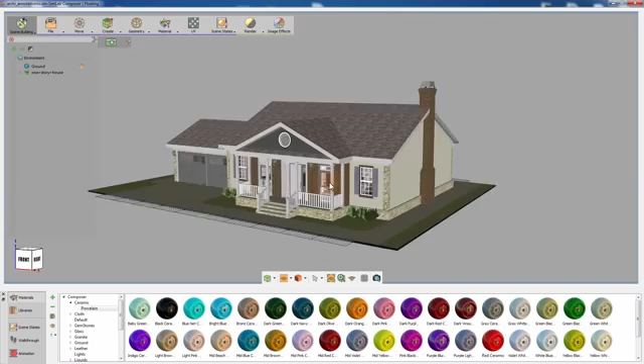In this tutorial, we are going to talk about adding annotations and measurements to your architectural design and how you can manage the measurements to create a professional presentation that facilitates communicating and sharing your design. This is a one-story house design created in SketchUp.

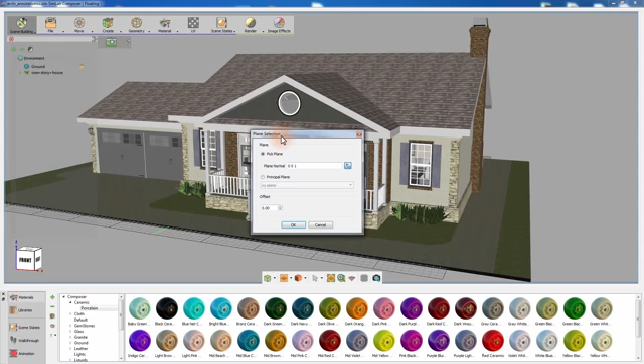Go to the Create menu and select Annotations. The Plane Selection dialog will appear. In this dialog, we are going to determine the plane on which we are going to create the annotations. Selecting the proper plane for the annotations creation is crucial in terms of where the annotations will be projected for viewing. Since we are going to add measurements for the front elevation, we need to select XY plane, or simply click on a parallel face to the front view.

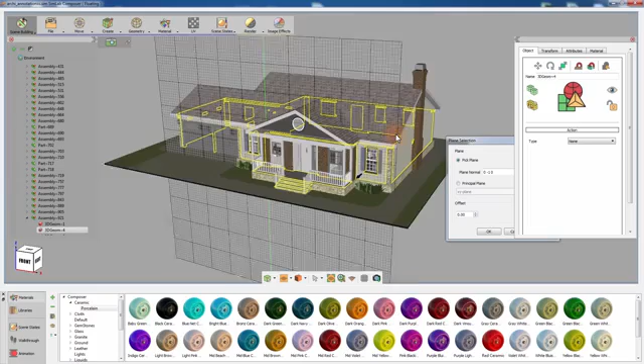Click on this wall and notice that a blue arrow has been created in the place of picking, indicating the normal of the plane you selected. Notice also that the grid has been rotated to match the plane you selected for annotation creation. Aside from picking a plane from the 3D area, you can determine the plane by selecting one of the principal planes in SimLab Composer. You also have the option to offset the plane you have selected parallel to its axis. Click OK to set the plane and initiate the Annotations Creation dialog window.

SimLab Composer allows you to create several types of annotations. The Linear Dimension tool measures the projected distance between 2 points on the principal axis, while the Aligned Dimension tool measures the distance between 2 points in space without projecting their location on a principal axis. The Radial Dimension tool measures the radius of circles and arcs in the design. The Angular Dimension tool can measure the angle between two intersecting lines. And the Leader Annotation tool allows you to add custom text with a pointer to the design.

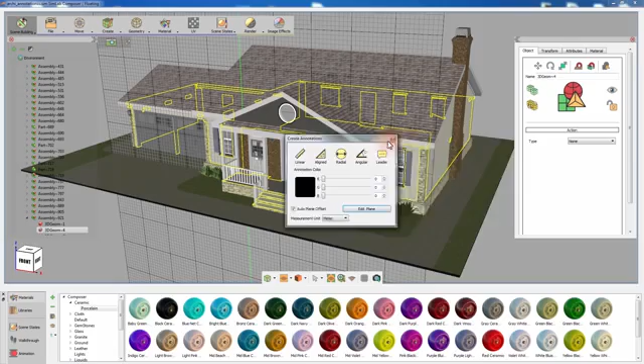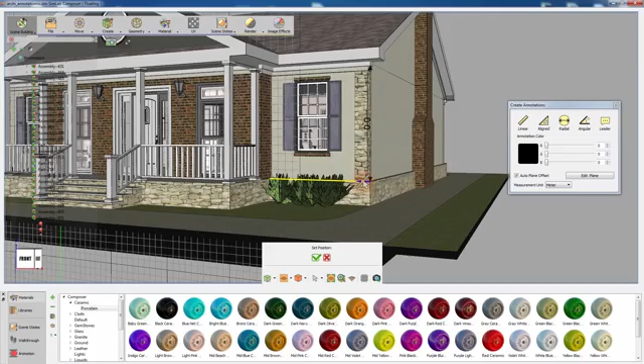Click on the Linear Dimension. To measure the height of this wall, click on the top edge of the wall to set the first point. Then click on the lower edge of the wall to set the second point of measurement. Move the cursor to determine the position of the annotation and click to confirm it.

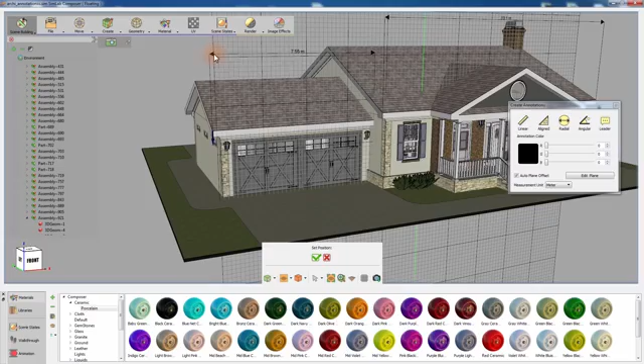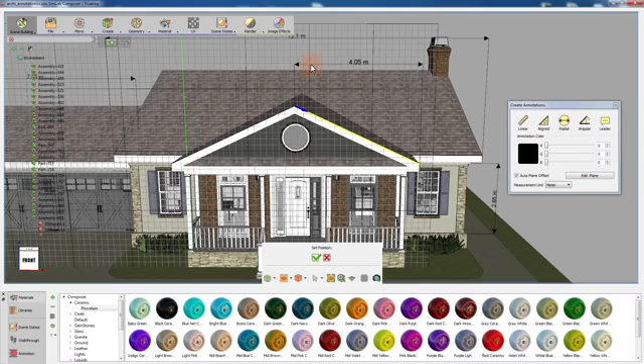To measure the width of the rooftop, create a linear dimension annotation and set the first point at the far right edge of the rooftop and second point to the far left. Move the cursor towards the top and click to set the position of the annotation. Click on Linear Dimension and measure the distance between two diagonal points. Notice that the Linear tool measured the projected width of the 2 points and not the distance between them.

Click on the Aligned Dimension tool and measure the distance between the same points you measured earlier. The Aligned Dimension tool will measure the distance between 2 points without projecting the values to the principal axis, which can be useful in measuring diagonal surfaces and edges. Select the Radial Dimension tool and click on the edge of the circular window to measure its radius. Click again to set the length of the annotation's indicator, and by moving the cursor, determine the length and orientation of the measurement's text.

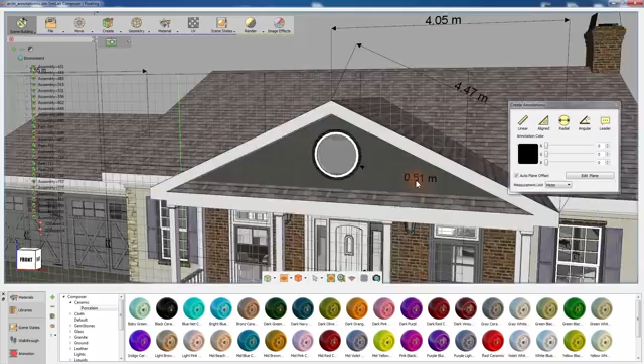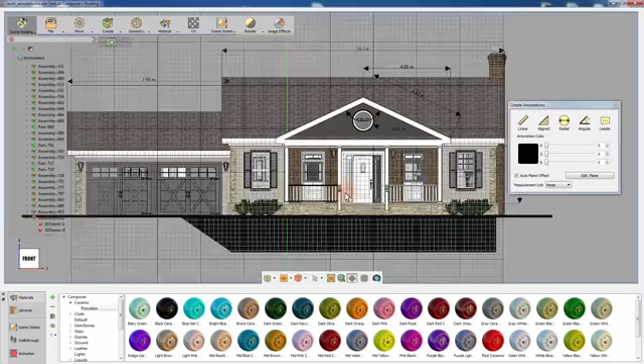Click on the Angular Dimension tool and click on an edge to set the first line, and then click on another intersecting line to measure the angle between them. Move the cursor to position the measurement's value and left-click to confirm its location. Aside from creating annotations in 3D space, you can set the camera to a front view and switch the camera from a perspective view to parallel view, which is the equivalent of an architectural front elevation drawing of a house. And from there you can proceed with adding annotations to your design.

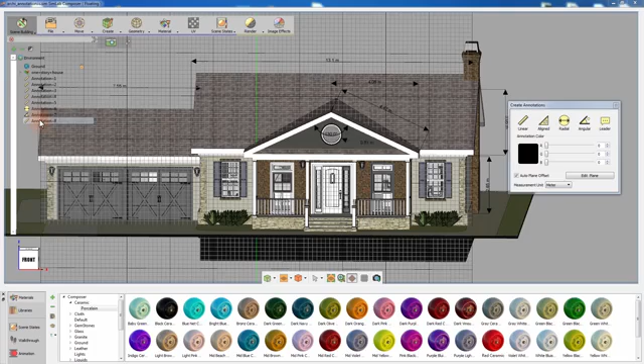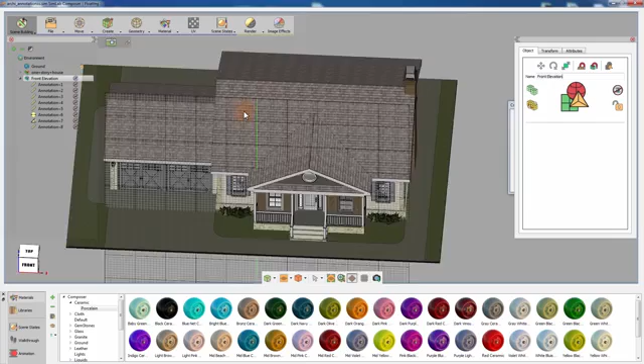In the Object Tree panel to the left, select all the annotations you have created and right-click and select Add Parent. Change the name of the newly created group to Front Elevation. Arranging the annotations into groups allows you to have better management and control over those annotations. Select the rooftop objects in the design and press H on your keyboard to hide them and reveal the interior structure and details of the house.

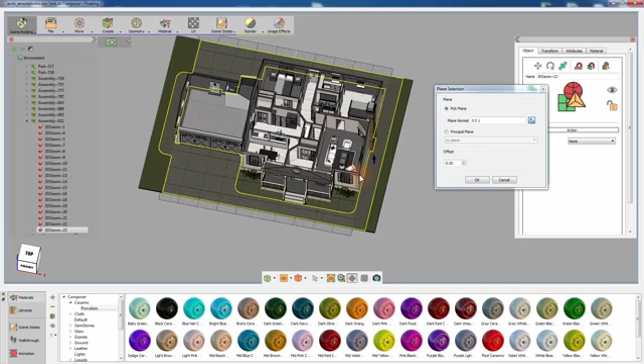Now that you are about to create annotations for the floor plan, you need to change the plane used for creating the annotations. Click on Edit Plane from the Annotations dialog and click on the ground or any surface parallel to the top view. Click OK to confirm the plane and go back to the Annotations dialog. Following the same steps as earlier, create a linear dimension. Then set the 2 points of measurement by clicking on edges. Then set the position of the measurement text and left-click in the position to confirm the creation.

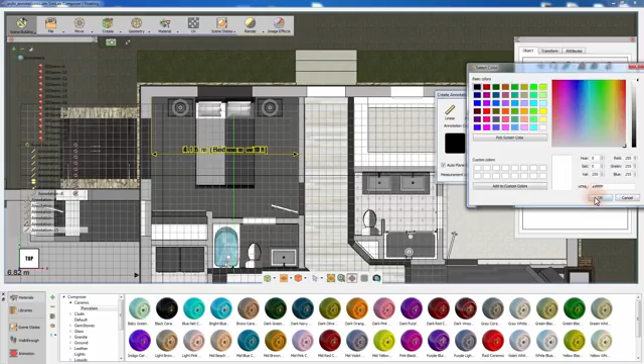Click on the annotation you created to access its attributes. From the Attributes panel to the right, you can add extra text that will be positioned next to the measurement value. You can also change size and color of the annotation through the panel. Changing the size of the annotation can be used to clarify its appearance or to emphasize its importance, while changing the color can eliminate conflict with the color of the object behind the text, or it can be used as a way to manage your annotations, where you give a group of annotations a certain color to indicate their purpose.

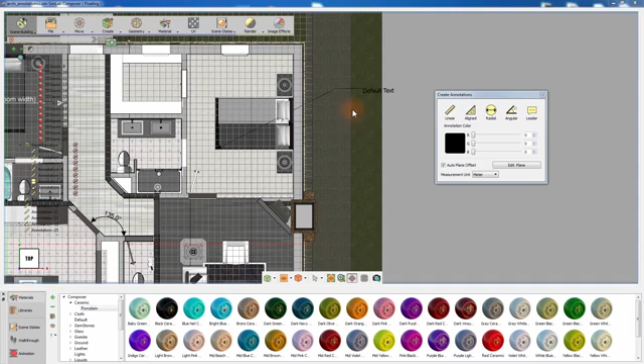Create a leader annotation and click on a surface or an object to create an indicator pointing towards it. You can click several times in the 3D area while moving the cursor to determine the path of the indicator for the leader annotation. Click on the green mark to confirm the creation, then select the created annotation and from the Attributes panel, type in a custom text. Leader annotations are a great tool besides the measurement tool. They allow you to add notes and identities to your design.

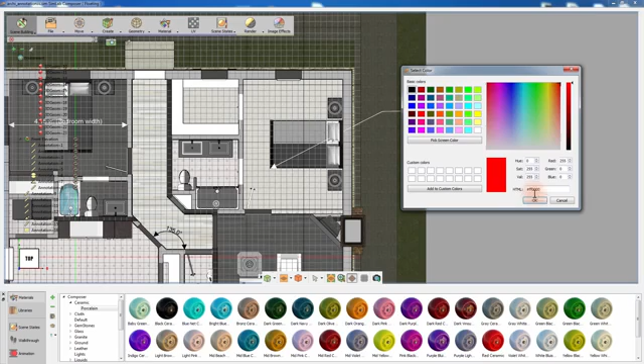Click on the Color thumbnail in the Annotation Creation dialog window and change the color from black to red. Changing the annotation color from the dialog window predefines the color of the annotations that will be created. So instead of changing the color of each annotation one by one after they have been created, you can change the color of those annotations prior to their creation.

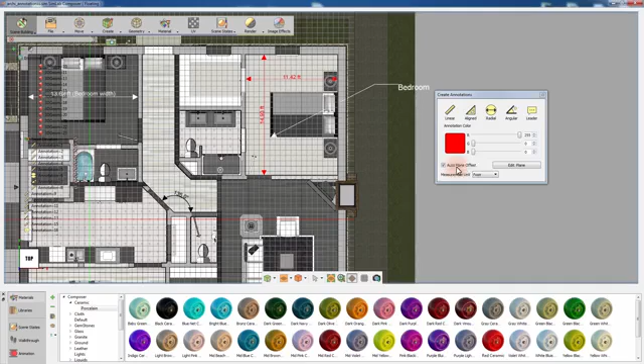You can also change the measurement unit from the dialog box. Changing the unit will affect all the annotations in your design.

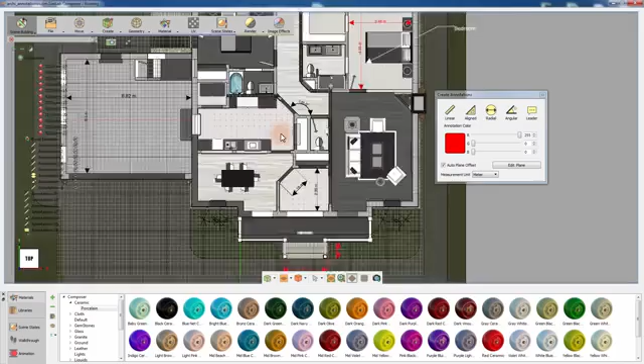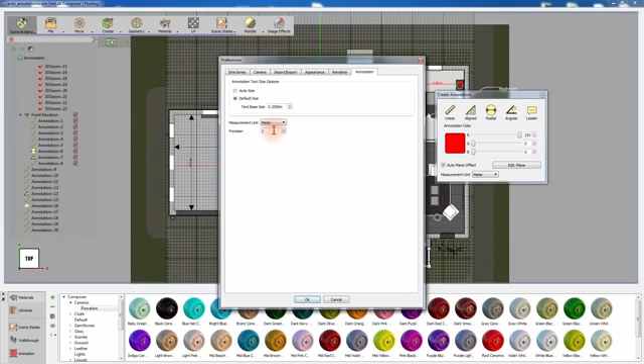Additional attributes for the annotations can be accessed from the Preference window in the File menu. You can find an auto size option which will determine the size of the annotations automatically based on the size of your model. You can change the measurement unit and also set the annotation precision, which controls the number of decimal digits to calculate in the annotations.

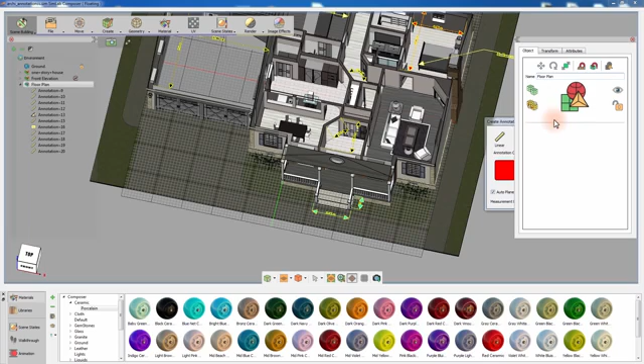Select the recently created annotations from the object tree to the left, and right-click and select Add Parent. Set the name to Floor Plan. Now that all the annotations in the scene are grouped according to their corresponding view, you can hide and show them as needed.

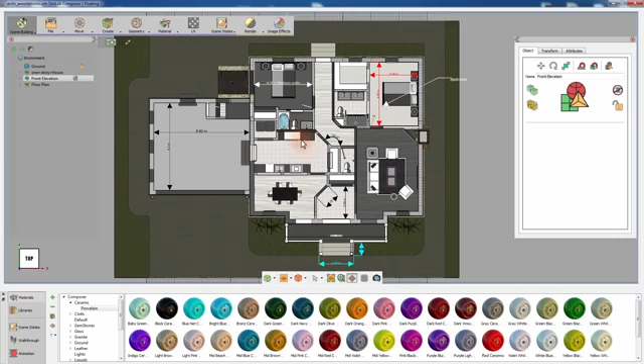Hide the front elevation group and the roof objects, then set the camera to a top parallel view. Then go to the Scene States menu and select Capture. Scene States allow you to capture several attributes from the scene and store them. When the captured scene states are activated, it will reapply all the attributes it stored back into the scene.

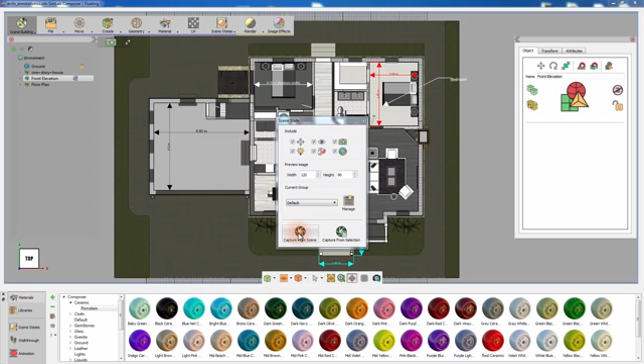To see how scene states can synergize with annotations, make sure that the visibility and camera options are included in the scene state and click Capture from Scene. Switch to a front parallel view

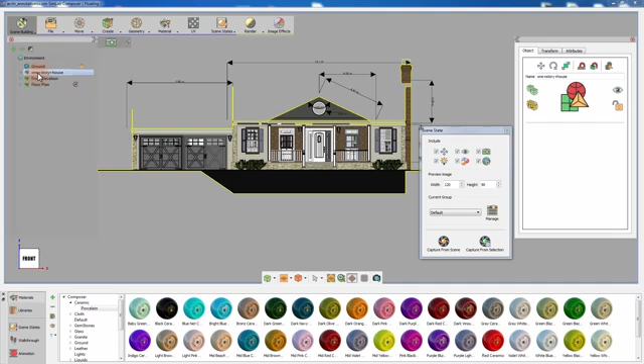and show the elevation group by clicking the visibility icon in the Attributes panel or by pressing S on your keyboard, and at the same time hide the floor plan group by pressing H on your keyboard. You can also show the roof by selecting the house group and pressing S on your keyboard. Once you're set, click on Capture from Scene.

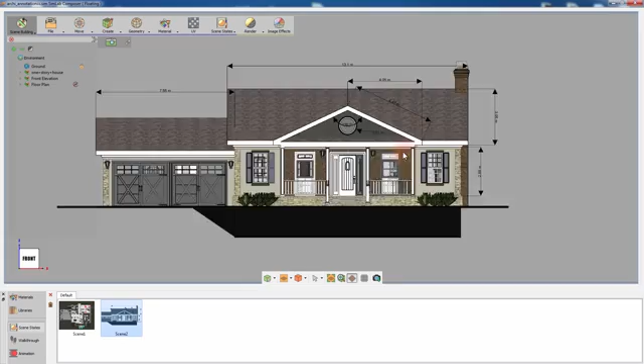Go to the Scene States tab in the panel at the bottom, and you will find the captured scene states there. Drag the thumbnail of the scene state to the scene to apply it. Reveal all the objects and annotations in the scene and set the camera to a perspective view and click Capture from Scene to create a third scene state.

Click on the first scene state and from the Attributes panel to the right, rename it to Top. Select the second scene state and name it Front. And name the third scene state Perspective.

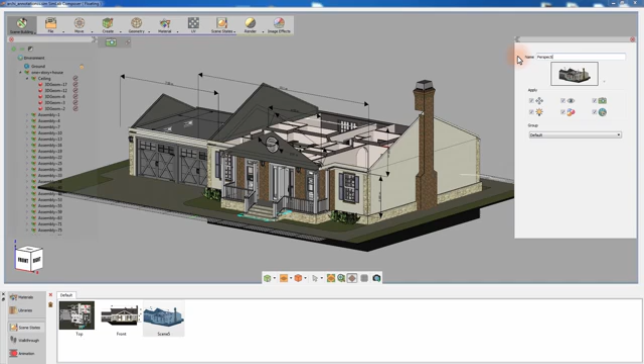To export the 3D design along with the measurements and scene states as a 3D PDF document, from the File menu, click on the 3D PDF settings. Create a new template for the 3D PDF. Set the size of the PDF file and click OK. Add the 3D area where the design will be displayed, and using the red draggers, determine the size and shape of the 3D area.

Click on the text icon to add text to the template. Type in Front Elevation and set the size and font for it and click OK. From the text attributes to the left, set the type to Scene States. Setting the text type to Scene State will turn the text to a button that will apply scene states when clicked. Type in the name of the scene state exactly as created in SimLab Composer. For the front elevation view, we named the scene state Front, so we type Front in the box.

Press Ctrl and C, then Ctrl and V on your keyboard to duplicate the text. Slide it to the right, then double-click on it and change the text to Floor Plan. Change the scene state name for this text to Top, which is the name we used for the floor plan scene state. Press Ctrl and C, then Ctrl and V again to duplicate the text. Change its position, then double-click to edit it and type Perspective. Then change the scene state associated with it to Perspective as well.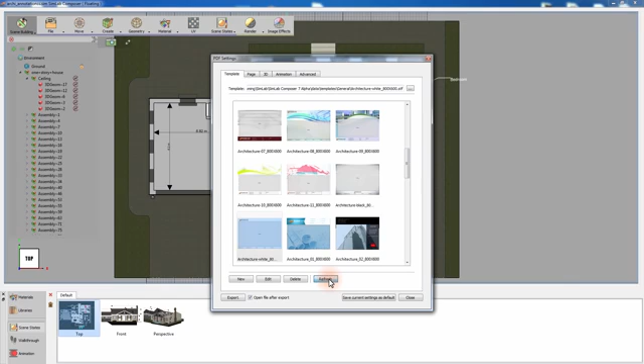Save the created template and close the template editor. Then click Refresh and select the template you created and click Export. Set the location and the file name for the PDF you are about to create and click Save. Make sure that you have all the scene states that you need checked and click OK.

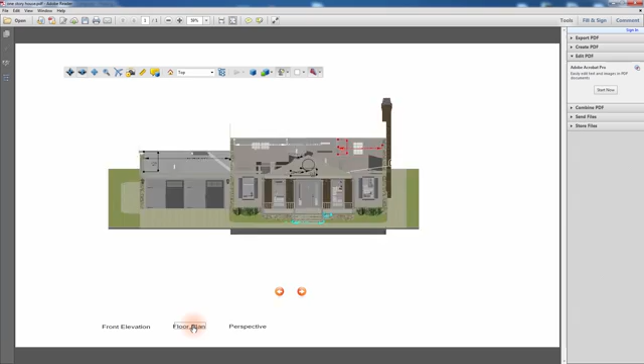SimLab Composer provides valuable tools for architects that can improve the quality of their work and can ease the process of communicating their designs. The use of annotations in combination with scene states in a 3D PDF document results in creating a unique presentation where you can visually channel your ideas to others without much effort.